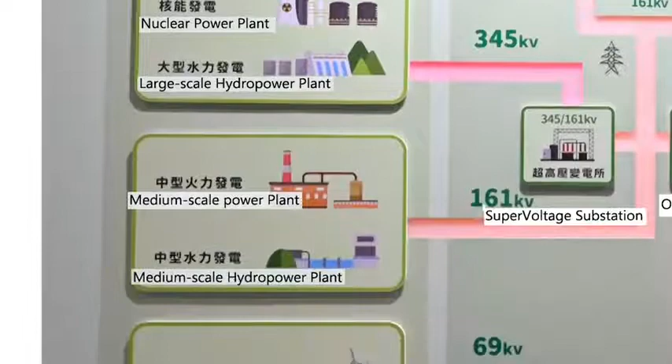In this video, you'll see our latest cybersecurity solution for power substations. Now, before we begin, let's cover some basics. So the poster behind me is a simplified diagram of the power grid. The electricity we all use is generated from the power plants on the left-hand side, then delivered to consumers through the transmission and distribution networks.

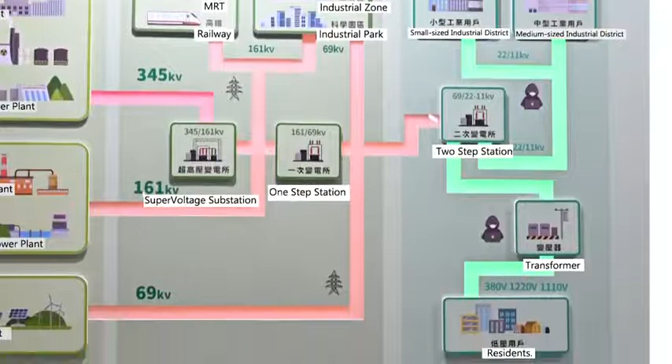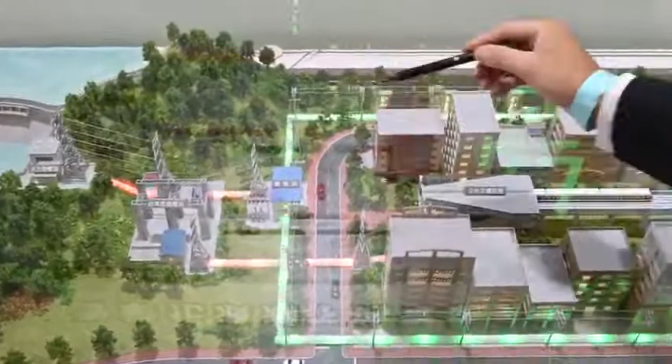The whole grid is made of substations and power lines. The major part where cybersecurity is applied is substation automation systems. So here we have a more vivid model to represent the power grid of a city. It includes the power plant, the high voltage substation, the low voltage substation, and the industrial and residential consumers.

As an industrial networking solution provider for power automation, we care about cybersecurity. So next, we want to show you what are the possible attack scenarios to substations and what are the countermeasures that we could do to prevent it from happening.

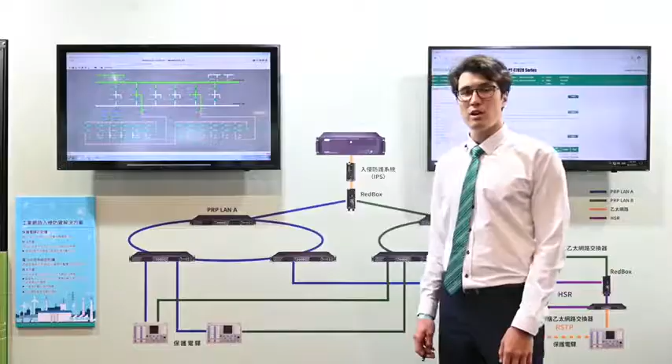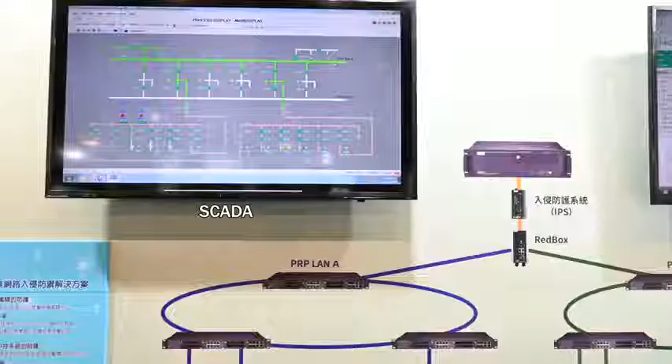This is a simplified substation network architecture. The key component here is the intelligent electronic device. Its job is to protect the primary equipment and power grid from damage caused by voltage, current, or frequency anomalies. Modern IEDs are connected via Ethernet networks to each other, as well as to the SCADA system, which is a human-machine interface for the operator to control the entire facility.

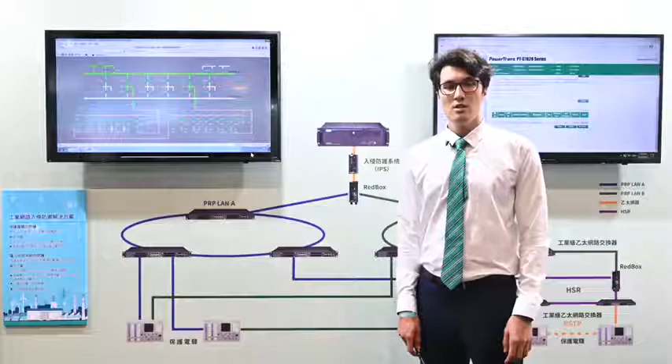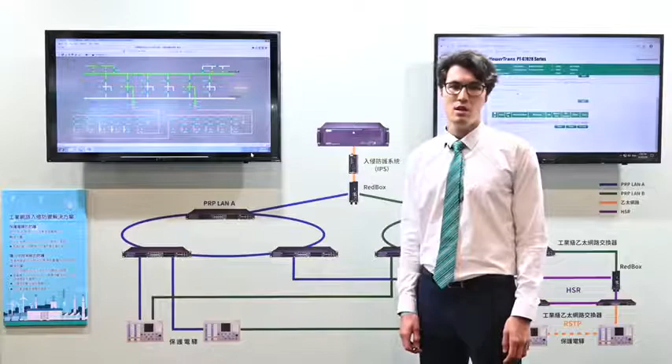So these two components, IED and SCADA, are the most critical and could be the primary cyber attack targets. The attack vectors may include compromised WAN links, as well as internal attacks through removable media or other unauthorized devices. Let's see what may happen if adversaries get access to the substation network.

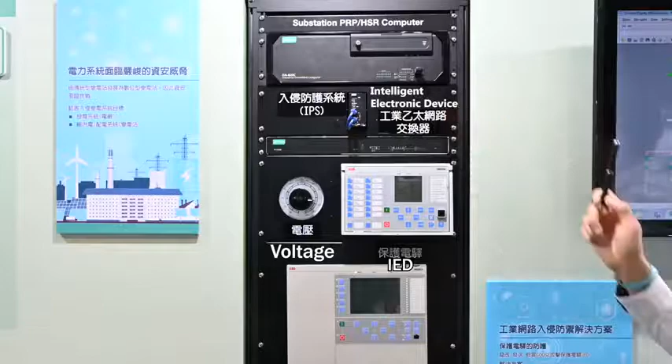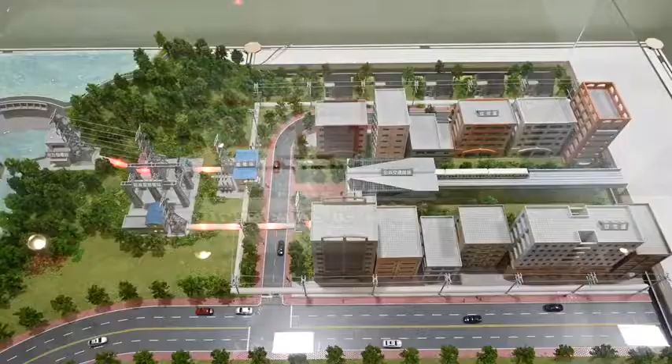We have built a test bed consisting of 2 IEDs and a SCADA server, which are connected through an Ethernet switch. Also, we have an additional cybersecurity appliance here, which we will introduce later. The first example is to trick the IED to trigger its protection. Let me use my attack tool and target the IED. As you can see, the residents of this city are going to have a romantic evening with candles.

The target for the second example is SCADA. What I can do here is to disrupt its operation. This will leave the substation personnel without control, making it much harder to handle the incident. I think you all agree that these examples showed serious impacts. So let's take a deep dive into what exactly happened and how we can prevent it from happening.

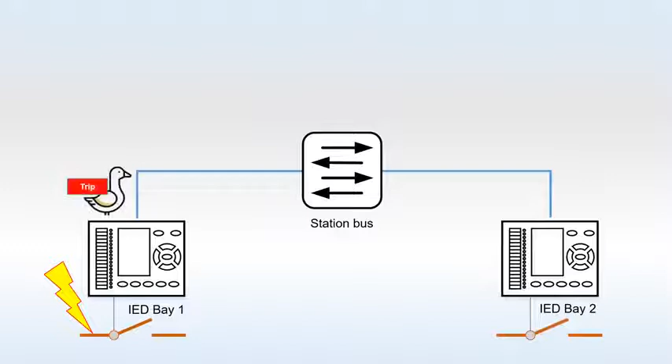In the first scenario, I exploited the IED to IED communication protocol, which is called GOOSE. It is used for one IED to report its status to another IED, so protection functionality can span across different areas of the substation. If there's a failure in one bay, the other bay's protection should react accordingly. GOOSE was originally designed unencrypted because of its time-critical nature. There is an additional standard which implies digital signing of GOOSE messages. However, it's not widely adopted yet.

Also, for time-critical reasons, GOOSE uses multicast transmission. So it's easy for an attacker to sniff messages, study their contents, and forge a malicious packet that mimics an IED announcement about failure. This is exactly what I did with my attack tool during the demo. It's not practical to put firewalls between IEDs because it will add unacceptable latencies. So our solution is based on the Ethernet switch.

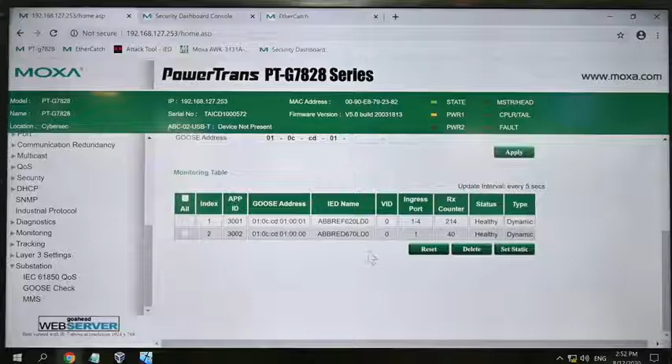Moxa PT series provides a special feature which is called GOOSE Check. It recognizes GOOSE protocols, remembers legitimate flows, and detects tampering activities. During the commissioning stage, we can verify that all GOOSE flows are legit via the switch user interface. Then, we can lock it by enabling GOOSE Lock and tell the switch to drop abnormal GOOSE messages. Now let me try to run the same attack again. As you can see, nothing happens, and our happy residents can keep watching TV.

This is because the switch successfully detected the tampering attack and dropped malicious packets. Although the attacker created packets identical to the packets that the IED sent in the case of a failure, the switch knows that they are coming from a different physical port, which triggers tampering detection and filters the malicious messages out. Such filtering is performed on a hardware level so it doesn't add any latency. By the way, the GOOSE Check feature can also be used for troubleshooting because it provides some information about the flows.

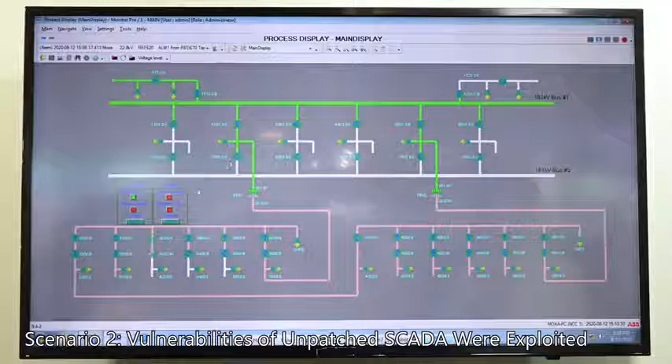During the second attack, I exploited a known vulnerability of the SCADA computer's operating system. Actually, SCADAs usually run on top of Windows. In other words, they are similar to our home and office computers. The difference, however, is that they are not patched regularly. This is because any change in critical automation systems has to be verified and approved. So you can find much outdated software in the field.

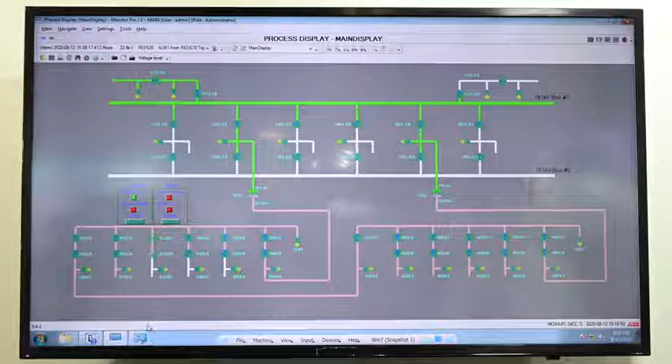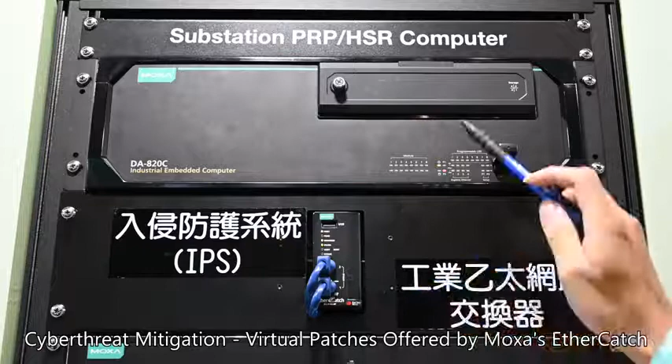In this example, we have an unpatched Windows 7 computer, so I was able to use a publicly available exploit for the RDP protocol and easily cause the whole system to halt. To overcome these challenges, we can put in additional protection like IPS in front of SCADA computers. It can provide a function called virtual patch. The majority of vulnerabilities are executed through the network.

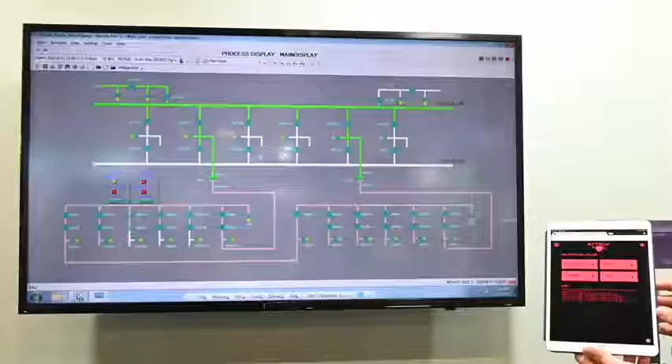Now that the protection is on, let's try to execute the same attack one more time. As you can predict, the SCADA remains fully functional because the attack was blocked. This can also be seen in the logs of the IPS unit. In addition, EtherCatch provides you OT protocol-aware firewall functionality to further strengthen your network security.

Moxa provides a wide-range portfolio of IEC 61850 compliant products for power automation. In this brief demonstration, we showed you some security features of Moxa solutions.